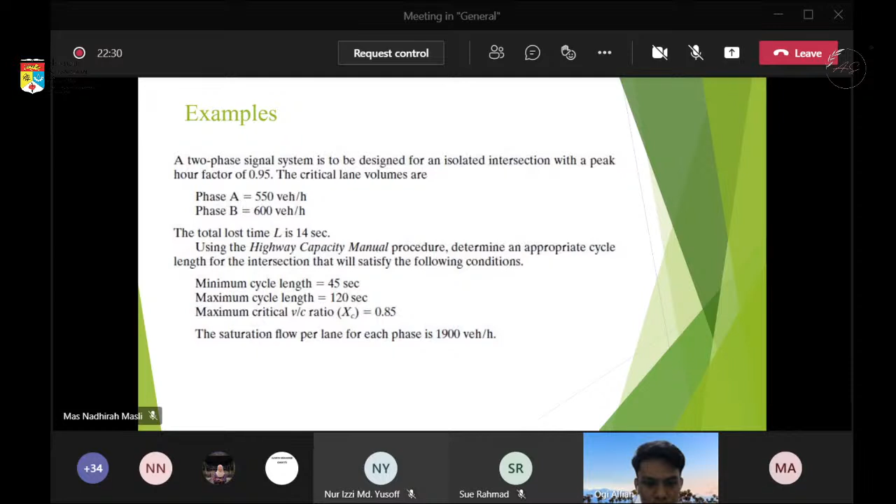The first step is to find the value for the first phase, which is V over C for A. So we divide V divided by S, and using the peak hour factor from the question, we find the value for V over C.

We also find the value for V over C for B. Next, we need to sum both values of V over C, and the value here is 0.637.

Using the formula XC, we calculate and substitute the values we found earlier. So we found that cycle time is 55.9 seconds, which is roughly around 60 seconds. This means that for each green time, the adequate green time is 60 seconds for the intersection. That's all for my part, I will pass to my friend.

I will pass to my friend. Any question from the floor? Semua faham? What's your friend trying to tell? Okay, continue.

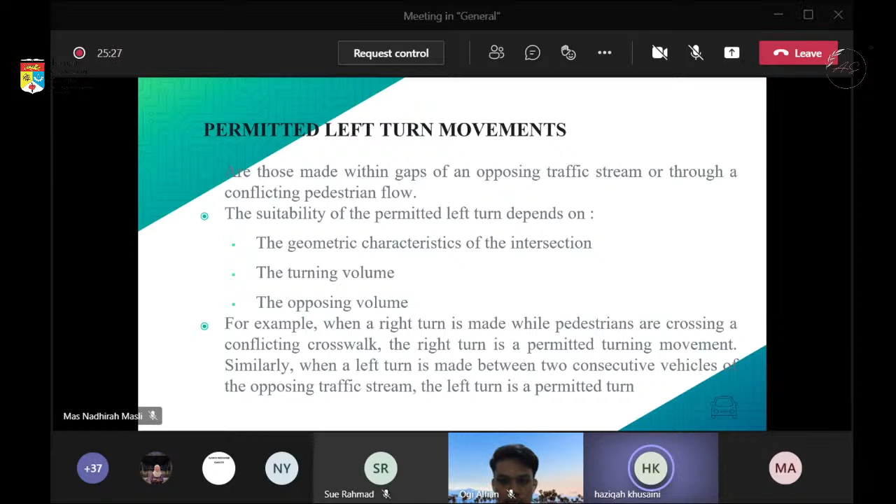Permitted left-turn movements are those made within gaps of an opposing traffic stream or through a conflicting pedestrian flow. The suitability of the permitted left turn depends on the geometric characteristics of the intersection, the turning volume, and the opposing volume. For example, when a right turn is made while pedestrians are crossing a conflicting crosswalk, the right turn is a permitted turning movement. Similarly, when a left turn is made between two consecutive vehicles of the opposing traffic stream, the left turn is a permitted turn.

Protected turn movement: turns protected from any conflict with vehicles in an opposing stream or pedestrians on a conflicting crosswalk. A permitted turn takes more time than a similar protected turn and will use more of the available green time. When a protected left-turn phase is provided, an exclusive left-turn lane must be provided. The length of the storage lane should be adequate for the turning volume so that the safety or capacity of the approach is not negatively affected. The length of the left-turn lane can be determined from figure 8.13 and table 8.4.

Table 8.4 shows the left turn bay length adjustment factors.

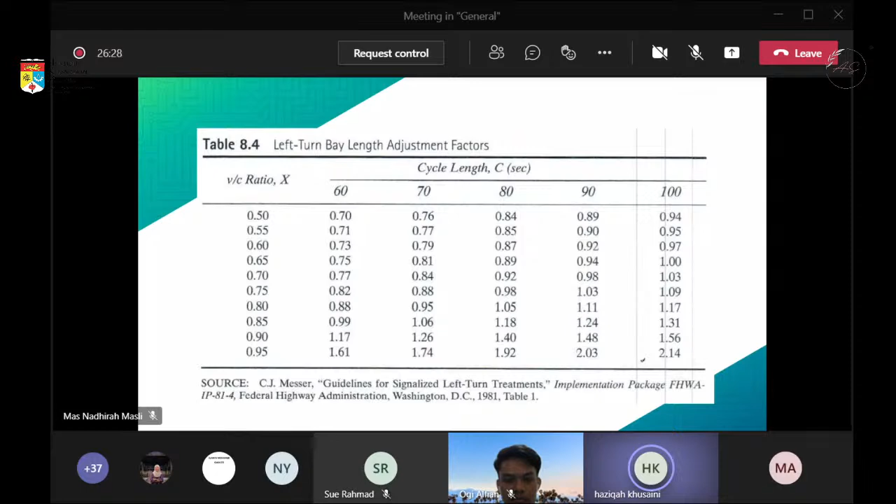Figure 8.13 gives values obtained for a cycle length of 75 seconds and a ratio of 0.80. For other values, the length obtained from this figure is multiplied by a correction factor obtained from table 8.4.

Protected or permissive left turn movement is a combination of the protected and permissive conditions. Vehicles are first allowed to make left turns under protected conditions, and then allowed to make left turns under the permissive conditions.

Highway Capacity Manual guidelines for providing a protected left turn treatment phase: it should be provided when two or more left turn lanes are on the approach, when the left turn adjusted volume is higher than 240 vehicles per hour, or when the cross product of the adjusted left turn and opposing main line volume exceeds the value given in table 8.5.

The opposing volume usually includes the right turn volume, unless the analyst is confident that the geometry of the intersection is such that left turn vehicles can safely ignore the opposing right turn vehicles.

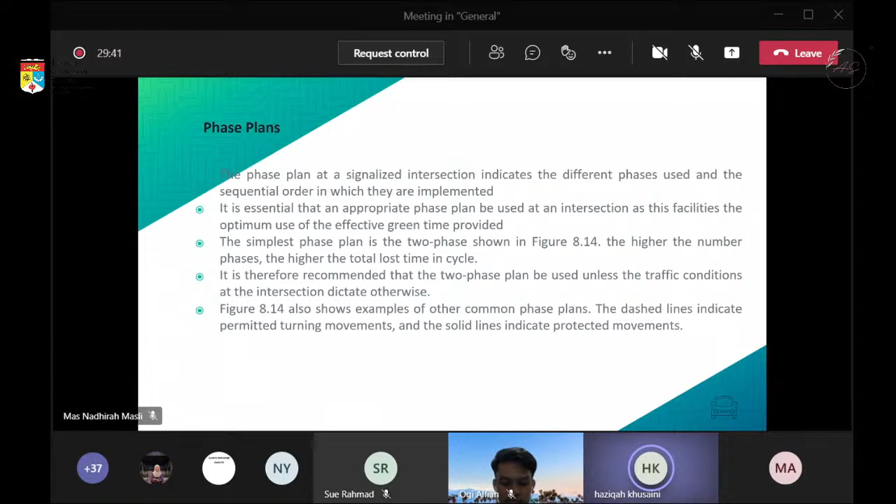Figure 8.14 also shows examples of other common phase plans. The dashed line indicates permitted turning movement, and the solid line indicates protected movement.

These are the figure 8.14 phase plans for pretimed and actuated signals. That's all from me, thank you.

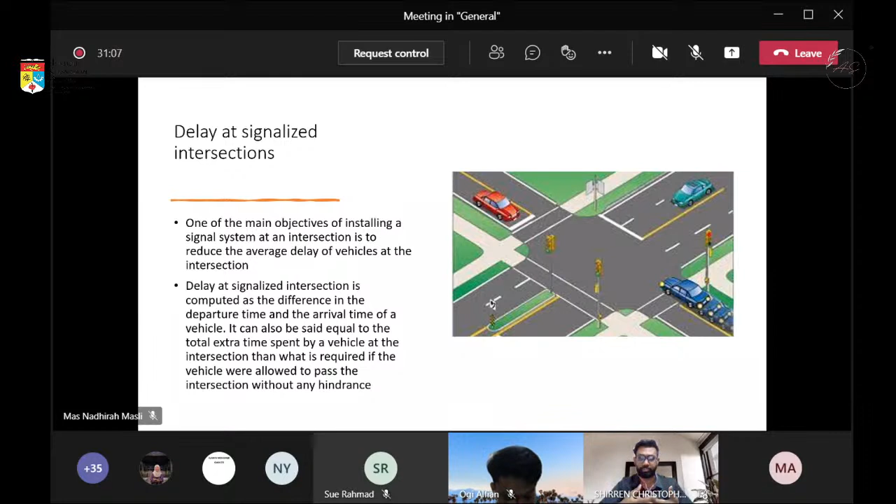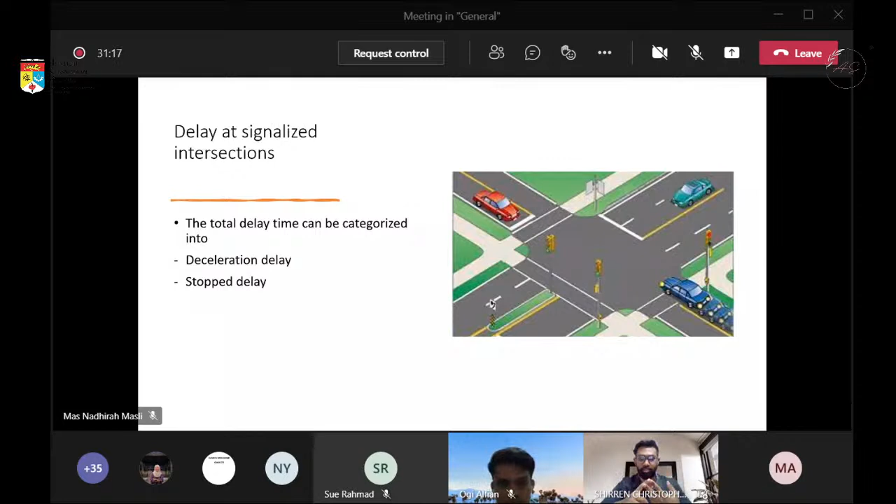The total delay time can be categorized into two different factors: deceleration delay and stopped delay. I'll explain this in the next slide.

The deceleration delay is the time loss that a vehicle takes in slowing down to reach a stop in case the signal is red, or the time loss in a queue moving when the signal is green. For instance, with cars number 1, 2, and 3: when the signal turns green, car 1 takes a certain amount of time to react, the second car takes lesser time, and the third car takes even lesser time, with the consequent cars being roughly constant in their reaction delay upon the signal turning green.

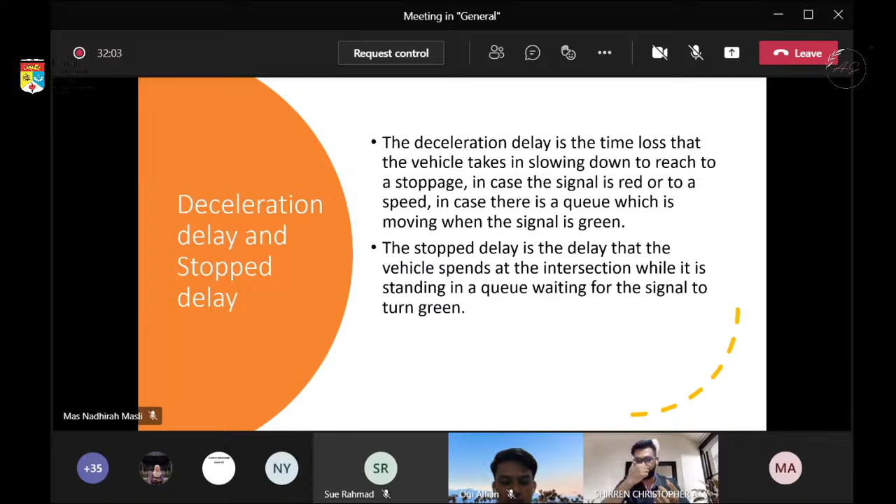The stop delay is the delay that the vehicle spends at the intersection while standing in a queue, waiting for the signal to turn green. Next, Ajay.

Speaking on the delay, although most of the delay incurred at a signalized intersection is directly caused by the traffic signal operation, a fraction of the delay is due to the time required by the individual to react to the change of signal display at the beginning of the green interval, plus mechanical constraints and individual driver behaviors. What this statement is trying to say is that it depends on the physical attributes of the driver himself in delaying his movement when the signal turns green.

For example, when the headway of departure vehicles is observed, it is seen that the front vehicle of the queue takes more time to cross a stationary point than the following vehicles, until it reaches the saturation headway. The saturation headway is the point where, after the first, second, and third vehicles have successfully moved past the delay, the following vehicles move at a constant speed - that's known as the saturation headway after some time.

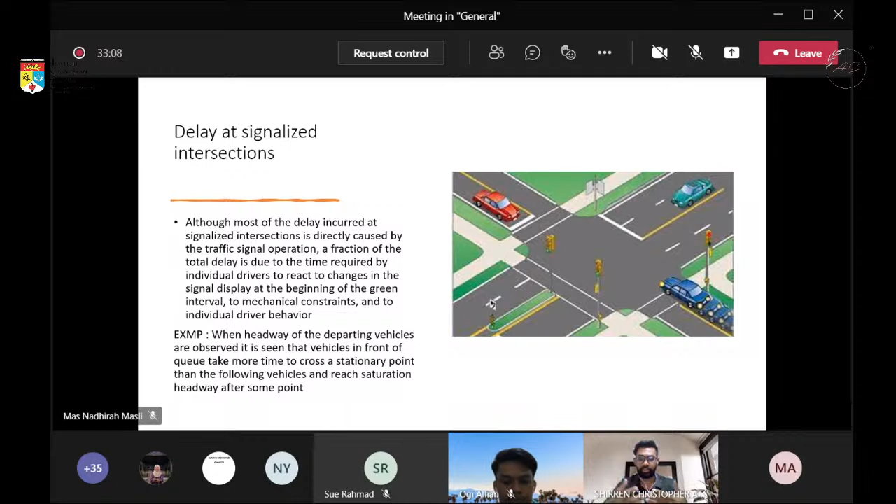In delay estimation models, to account for the additional delays due to driver reaction time and vehicle acceleration constraints, the operation of a signalized intersection is usually defined in terms of an effective signal interval instead of the actual interval. The amount of difference between the actual and effective timing will thus depend on the assumption regarding driver reaction time at the beginning of the green interval and vehicle acceleration.

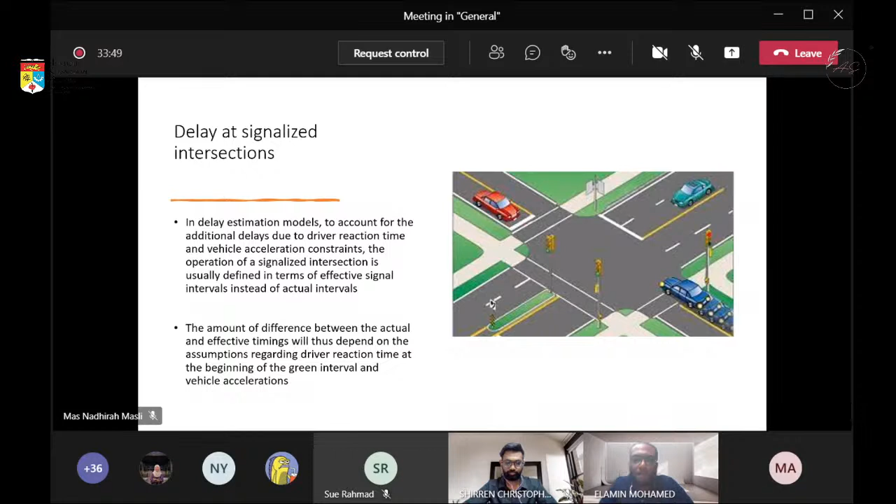Next, in order to estimate delay, we can use the expression developed by Webster, which is D equals C times A plus B over V times 100 minus C over 100, where D is average delay per vehicle, V is actual volume, lambda is proportion of cycle length, XG is degree of saturation, and C is percentage correction.

The total hour delay of any approach can be estimated by determining D for each lane on that approach, multiplying each D by the corresponding lane volume, and then summing these values. The total intersection hour delay can then be determined by summing the total delay for each approach.

This is the A values table we will use. They can be calculated directly using the formula mentioned in the first slide, or taken from this table for A and B, and correction value C.

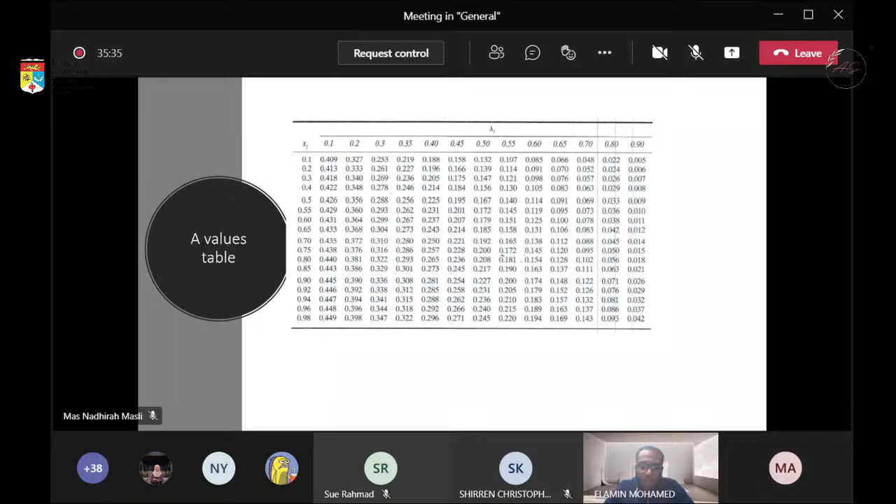So the A and B values depend, as you can see in the table, on the XG value and lambda value.

Next is cycle lengths of actuated traffic signals. A major disadvantage of fixed or pre-timed signals is that they cannot adjust themselves to handle fluctuating volumes. A vehicle-actuated signal is used when the fluctuation of traffic volumes warrants it. When such a signal is used, vehicles arriving at the intersection are registered by detectors which transmit this information to a controller.

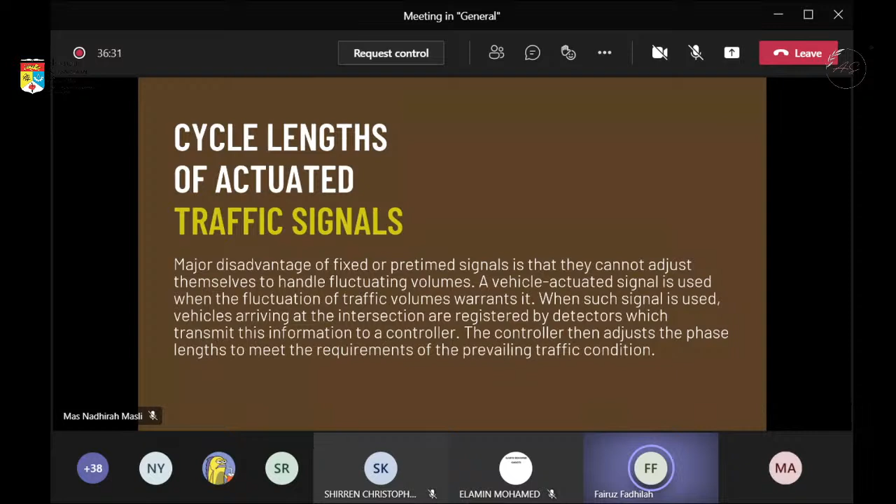The following terms are associated with actuated signals. First, demand - a request for the right of way by a traffic stream through the controller. Second, initial portion - the first portion of the green phase that an actuated controller is timed out for vehicles waiting between the detector and the stop line during the red phase. Third, minimum period - the shortest time that should be provided for a green interval during any traffic phase. Fourth, extendable portion - the portion of the green phase that follows the initial portion to allow for more vehicles arriving between the detector and the stop line during the green phase to go through the intersection.

Fifth, extension limit - the maximum additional time that can be given to the extendable portion of a phase after actuation on another phase. Sixth, unit extension - the minimum time by which a green phase could be increased during the extendable portion after an actuation on that phase. However, the total extendable portion should not exceed the extension limit.

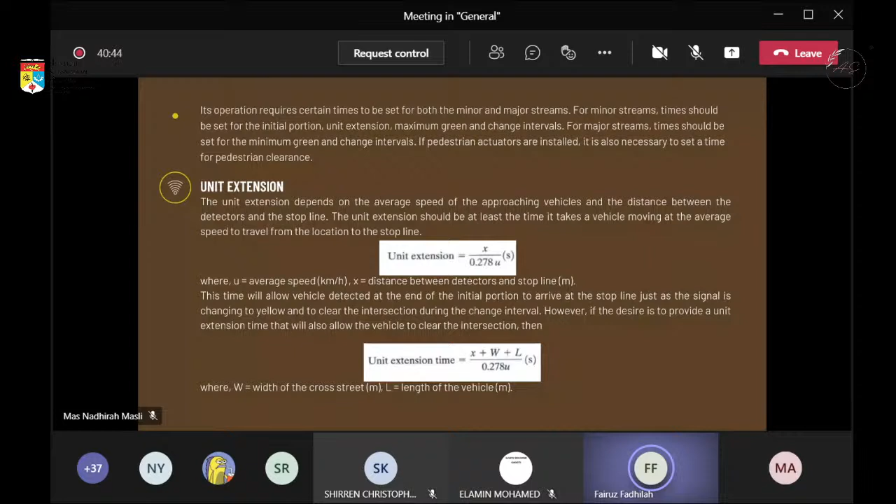Second one is initial portion. This time should be adequate to allow vehicles waiting between the stop line and detector during the red phase to clear the intersection. This time depends on the number of vehicles waiting, the average headway, and the starting delay. The time for the initial portion can be obtained as in the figure, where H equals average headway, N equals number of vehicles waiting between the detectors and the stop line, K1 equals starting delay. Third is minimum green. This is the sum of the initial portion and the unit extension.

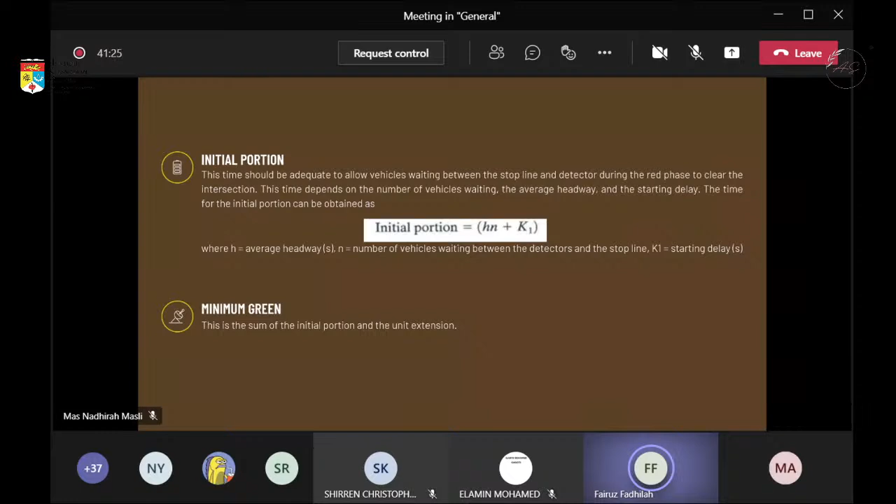Fully actuated signals. It is suitable for intersections at which large fluctuations of traffic volumes occur on all approaches during the day. Maximum and minimum green times are set for each approach. Its basic operation can be described using an intersection with 4 approaches and a 2-phase signal system.

Let phase A be assigned to the north-south direction and phase B to the east-west direction. If phase A is given the right of way, the green signal will stay on until the minimum green time ends, and an approaching vehicle in the east-west direction actuates one of the detectors for phase B. A demand for the right of way in the east-west is then registered. If there is no traffic in the north-south direction, the red signal will come on for phase A and the right of way will be given to vehicles in the east-west direction. That is, the green indicator will come on for phase B.

This right of way will be held by phase B until at least the minimum green time expires. At the expiration of the minimum green time, the right of way will be given to phase A, that is the north-south direction, only if during the period of the minimum green, a demand is registered by an approaching vehicle in this direction. If no demand is registered in the north-south direction and vehicles continue to arrive in the east-west direction, the right of way will continue to be given to phase B until the maximum green is reached. At this time, the right of way is given to phase A, and so on.

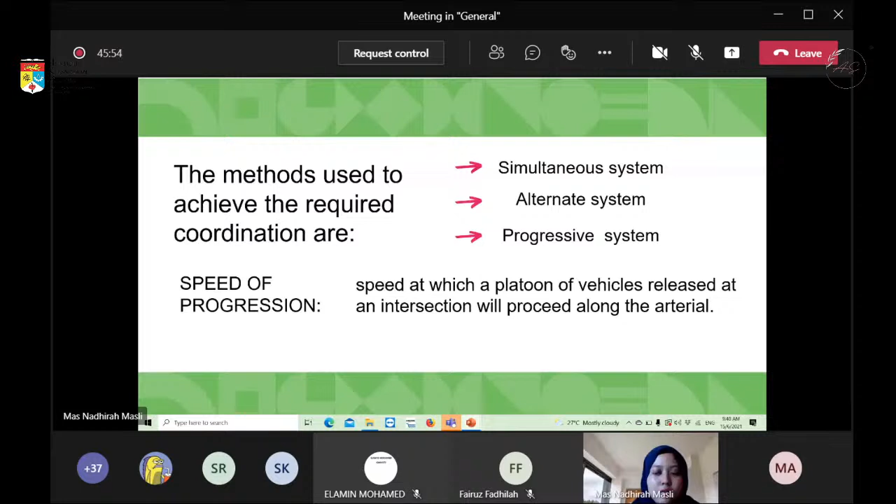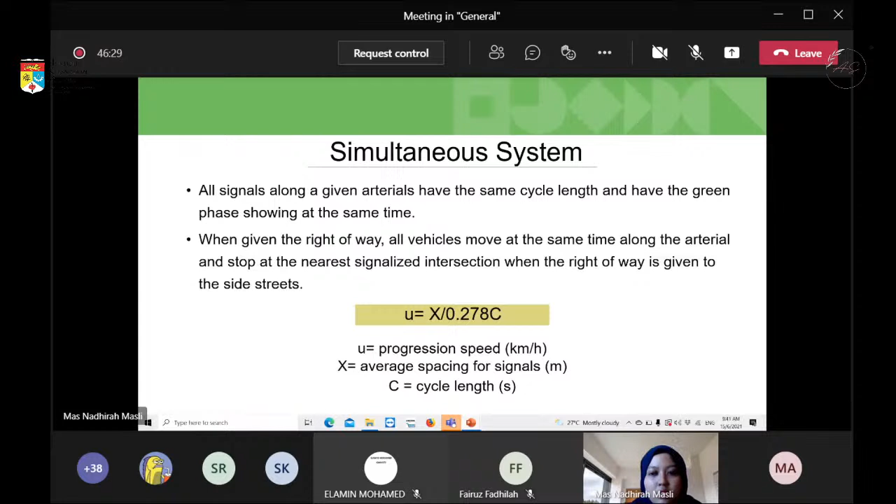An alternate system is most effective when the intersections are at equal distance from each other. Move on to the next point.

The progressive system. The progressive system provides for a continuous flow of traffic through all intersections under the system when traffic moves at the speed of progression.

The same cycle length is used for all intersections, but the green indication for each succeeding intersection is offset by a given time from that of the preceding intersection, depending on, first, the distance from the preceding intersection, and second, the speed of progression for that section of the street. The limited or simple progressive system is when the offset and cycle length are fixed. The flexible progressive system is when the offset and cycle length can be changed to meet the demand of fluctuating traffic at different times of the day.

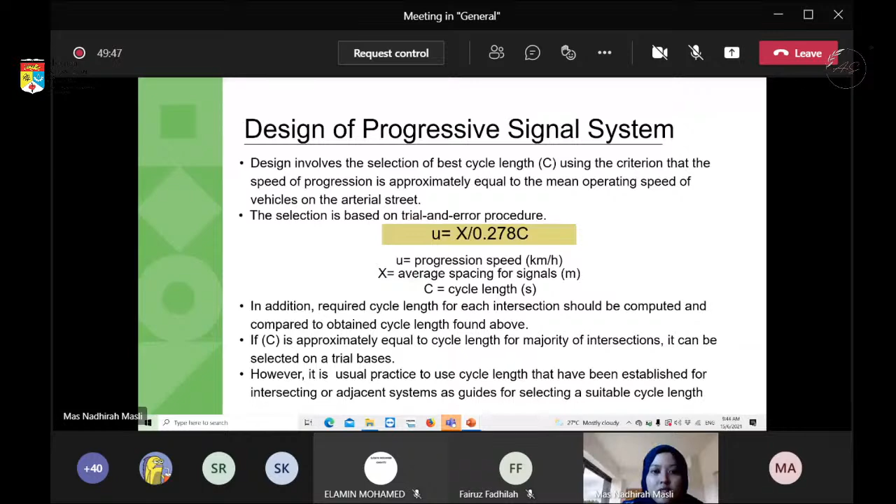Move on to example 8.8. Signals on an urban arterial are to be coordinated to facilitate the flow of traffic. The intersections are spaced at approximately 150-meter intervals, with at least one intersection being part of another coordinated system, whose cycle length is 60 seconds. Determine whether single, double, or triple alternate system is preferable for this arterial if the mean velocity on the arterial is 56 km/h.

We can use the alternate system equation. The solution is: since there is one intersection in another coordinated system, it is necessary to use the cycle length at that intersection, that is, C equals 60 seconds. We also use the alternate system equation. So this is how to use it. Okay, that's all from me.

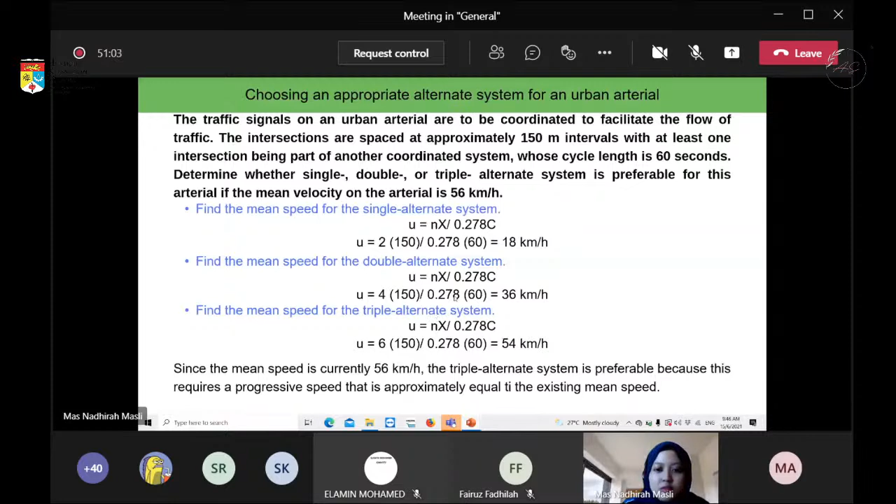Okay, next, freeway ramp.

Ramps are part of a grade-separated intersection where they serve as an interconnecting roadway for traffic streams at different levels, and are sometimes constructed between two parallel highways to allow vehicles to change from one highway to the other. They are divided into two groups: entrance ramps, which allow the merging of vehicles into the freeway stream, and exit ramps, which allow vehicles to leave the freeway stream.

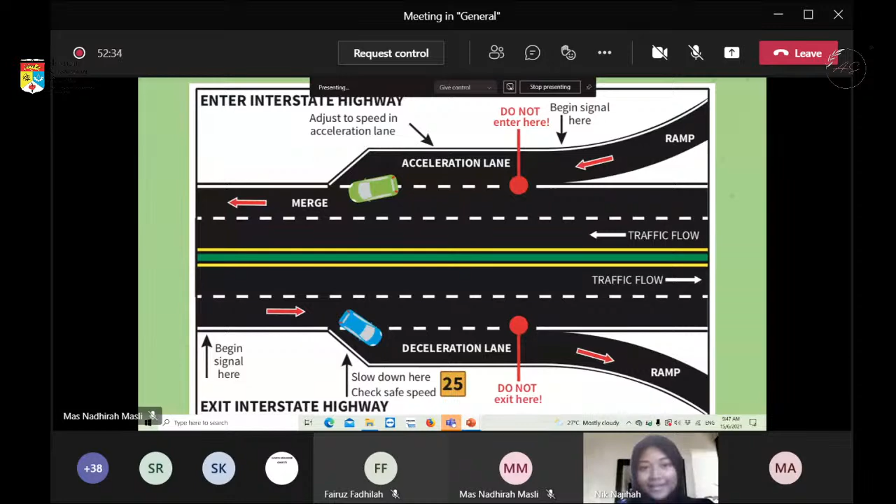The freeway entrance control is essential to efficient operation of freeways when volumes are high. The main objective is to regulate the number of vehicles entering the freeway so that the volume is kept lower than the capacity of the freeways, also to reduce freeway crashes.

There are three methods of controlling freeway entrance: closure, local isolated metering control, and system-wide coordinated metering control.

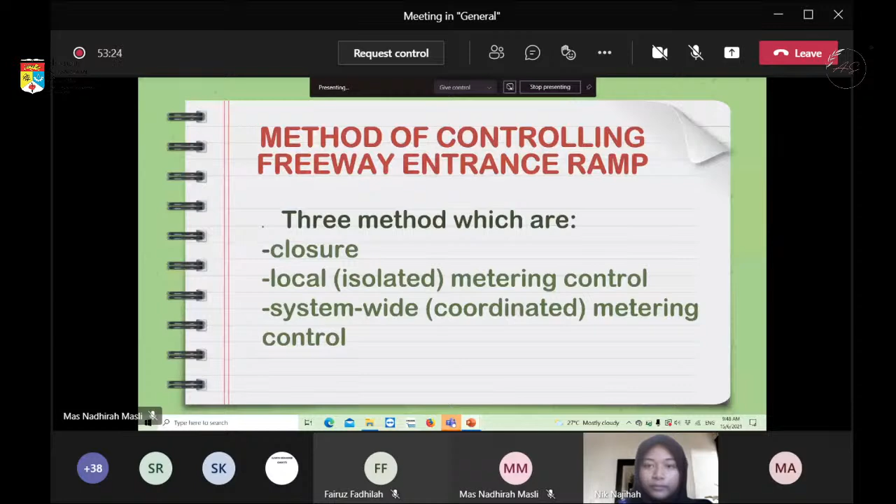For closure, usually a do not enter sign is used, or a barrier is placed at the entrance to the ramp. There are three types of closure ramps: permanent, temporary, and time of day or scheduled ramp closure.

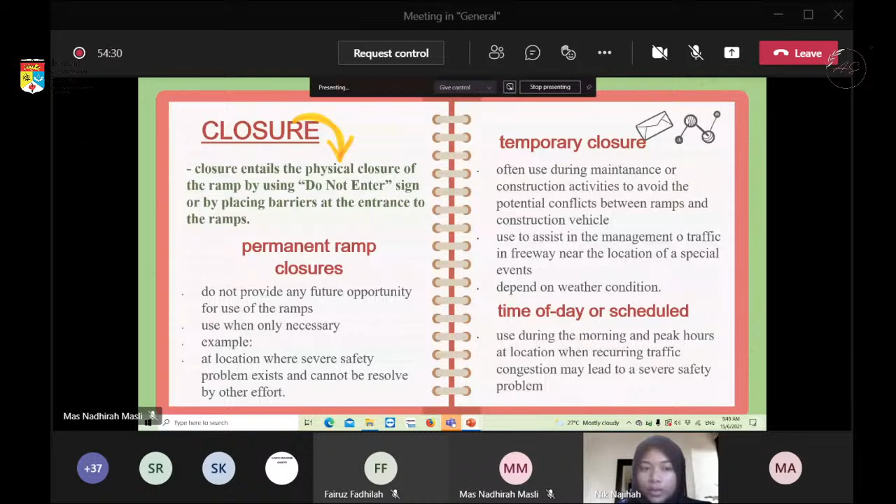Hello, okay. Next is local or isolated metering control. This method uses conditions at a specific ramp to determine the metering rate, with the objective of improving safety or alleviating congestion at the ramp.

This metering method can also be used at two or more ramps on the freeway, where the effect of metering at one ramp is not coordinated with the effect at another.

Next is system-wide or coordinated metering control. Here, conditions are used that include those at other adjacent ramps to determine the metering rate. This method can therefore be used for ramps along a freeway segment, an entire corridor, or several corridors where a problem at one ramp may affect other adjacent ramps.

This control is more effective than local control in dealing with capacity reduction that occurs as a result of road blockage and collision.

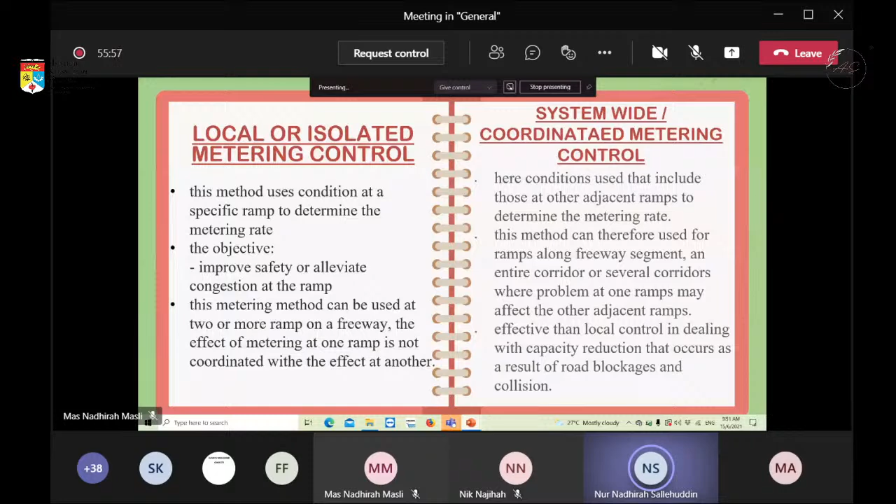Next is for the ramp closure. It consists of two components: barrier and enforcement personnel. Barriers can be either manually placed or automated.

For manual barricades, they can be either portable or fixed. Portable barricades can be moved from place to place and include gates and cones. Next is the fixed barricade.

Fixed barricades are usually permanently installed and provide the flexibility of opening and closing the ramp in response to traffic congestion.

For the automated barricade, it is a fixed barricade that can be operated from a traffic management center, TMC, or from another remote location. Next is the enforcement personnel.

Enforcement personnel is another method of ramp closure. This method is usually used on a temporary basis when automated systems are either not installed, or maintenance personnel are not able to install the temporary barricades. That's all from me.

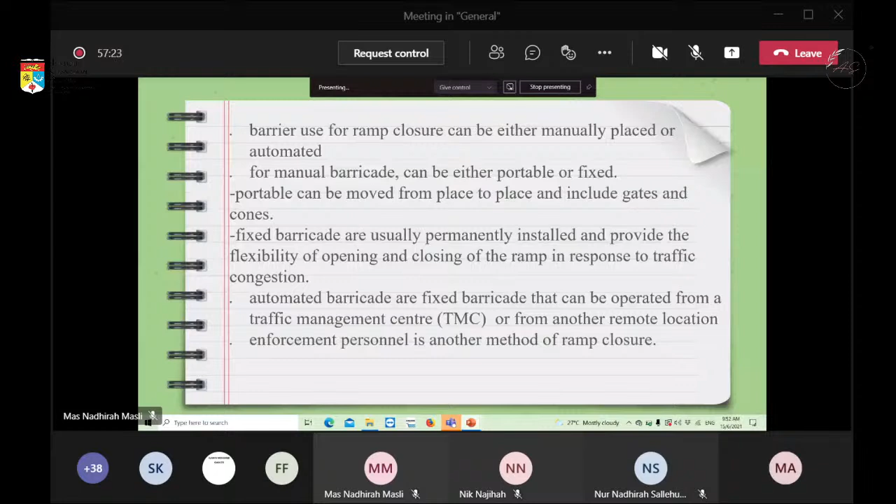Before I go further, first of all we need to know that ramp meters are one of our tools in freeway management. Ramp meters are traffic signals installed on freeway on-ramps to control the frequency at which vehicles enter the flow of traffic on the freeway.

Ramp metering also reduces overall freeway congestion by managing the amount of traffic entering the freeway. There are two methods of controlling ramp meters: the first is pre-timed metering, and the second is traffic responsive metering.

Pre-timed metering rates are usually made for different times of the day and days of the week. This can be used to reduce flow of traffic on the ramp from 1,200 vehicles per hour to 250 vehicles per hour.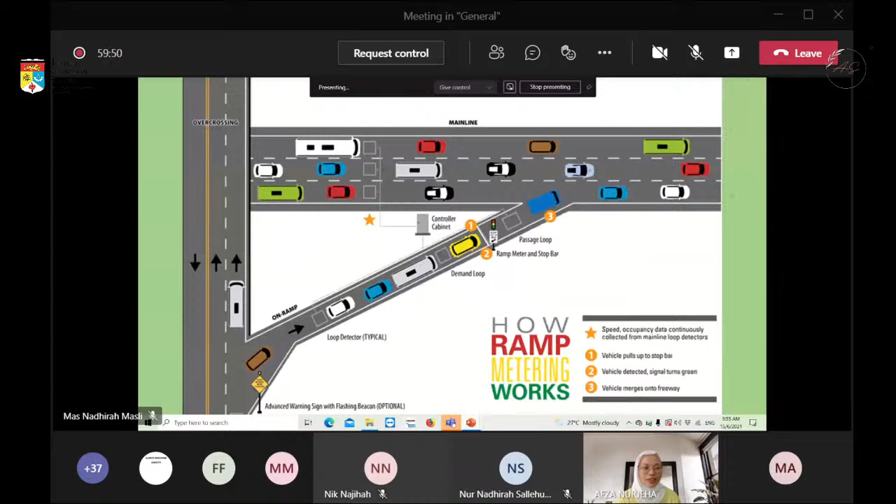Okay, this is also an example. As we can see, at the start loop, data is collected such as speed and other occupancy data from the main line. At point 1 is where the vehicle is pulled up to the stop bar, and at point 2 we can see there is the ramp meter where the vehicle stops.

When a vehicle is detected, the signal turns green, and then the vehicle can merge onto the freeway.

Okay, the second method of controlling the ramp meter is traffic responsive metering. This method uses actual current information on traffic conditions from freeway loop detectors or other methods of metering, and it is capable of responding to short-term changes in traffic conditions.

The layout is quite similar to pre-timed metering, but there are some additional features. There are two methods that can be used to determine the metering rate: the first is local traffic responsive, and the second is system-wide traffic responsive.

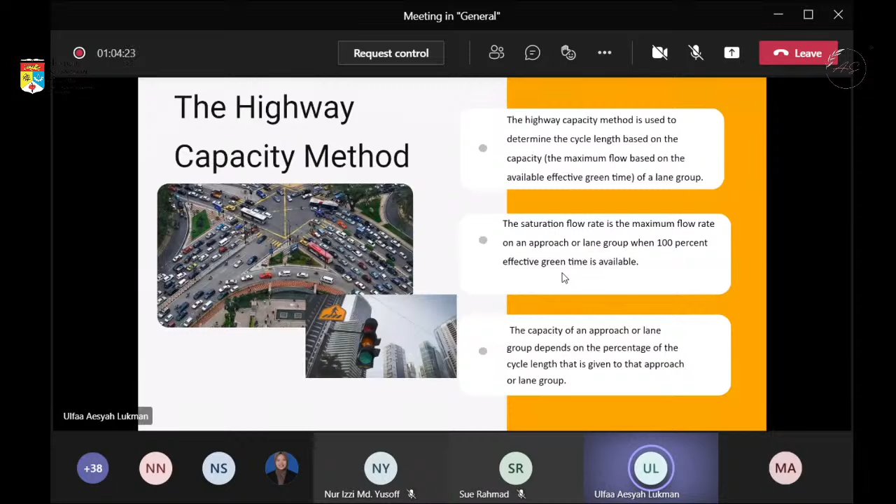Next we have the formula for the capacity of an approach or lane group, which is CI. We also have the formula for the ratio of flow to capacity, which is V per C. Next, we have the formula for the critical VC ratio for the intersection, which is XC. If VC ratio is less than 1, the cycle length provided is adequate.

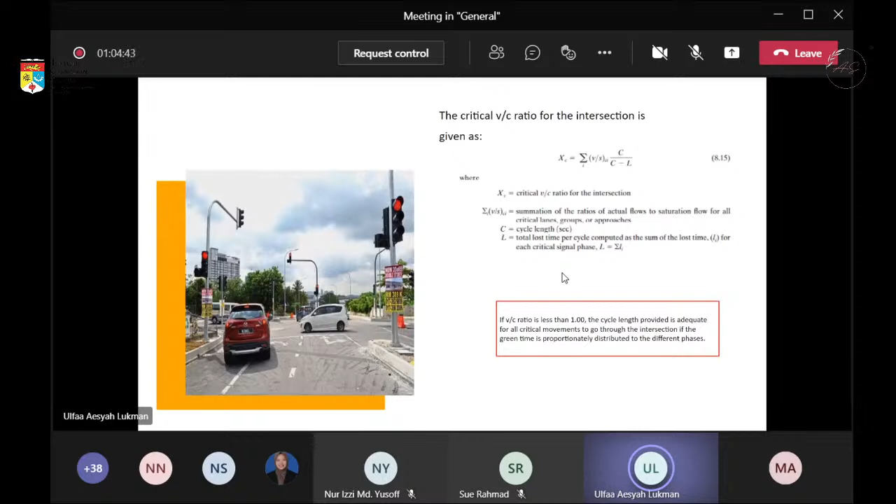Example 8.6. From this question we can see we have 4 different flow ratios and we need to find, number 1, the shortest cycle length that will avoid oversaturation. Number 2, the cycle length if the desired critical VC ratio is 0.95. And number 3, the critical VC ratio if a cycle length of 90 seconds is used.

To solve number 1, we know the shortest cycle length that will avoid oversaturation is the cycle length corresponding to the critical ratio XC, which is equal to 1. And we need to find C, which is cycle length. So we can just use the formula shown just now and solve this question, and the same goes for number 2 and number 3. Next is example 8.7.

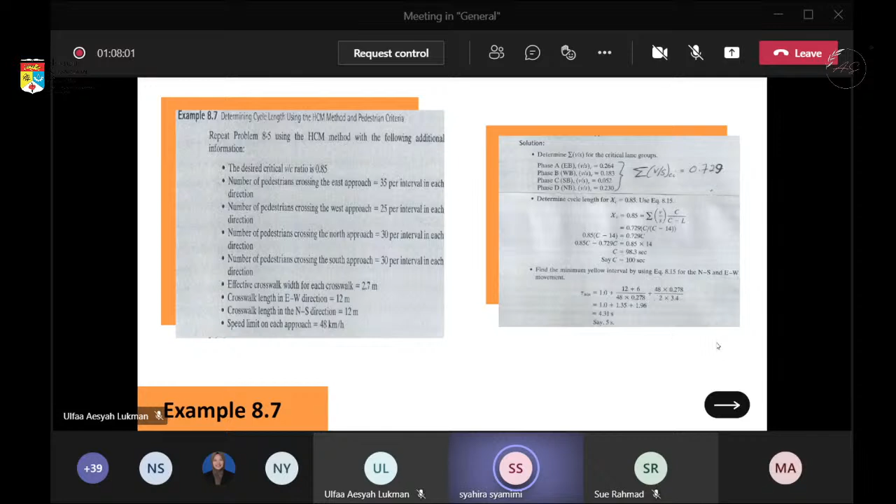First we need to find the XC, then the C, then we need to find the minimum yellow, which is tau minimum. Then we need to find the minimum time required for each approach: east, west, south, north. We also need to determine the left turn treatment. The left turn treatment is how a vehicle at a signalized intersection can proceed under three signals, so we need to choose between permitted, protected, and protected-permissive.

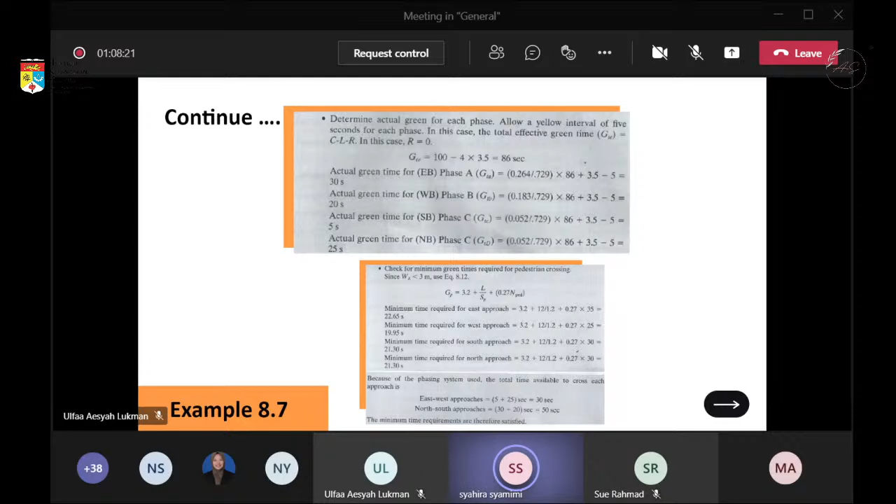So we need to determine, within these three signals: permitted, protected, and protected-permissive turning movement.

As for permitted, the turning movements are those made between gaps of an opposing traffic stream or through a conflicting pedestrian flow. For example, when a right turn is made while pedestrians are crossing a conflicting crosswalk, the right turn is a permitted turning movement. The suitability of permitted turns at a given intersection depends on the geometric characteristics of the intersection, so the turning volume and the opposing volume are considered.

Protected turns are those protected from any conflict with vehicles in the opposing stream and pedestrians in the conflicting crosswalk. Protected-permissive combines the protected and permissive conditions, which allows the car to make left turns first under the protected condition, and then subsequently under the permissive condition.

Hence, we need to determine the specific treatment at the location depending on the transportation jurisdiction, as the guidelines vary from one jurisdiction to another.

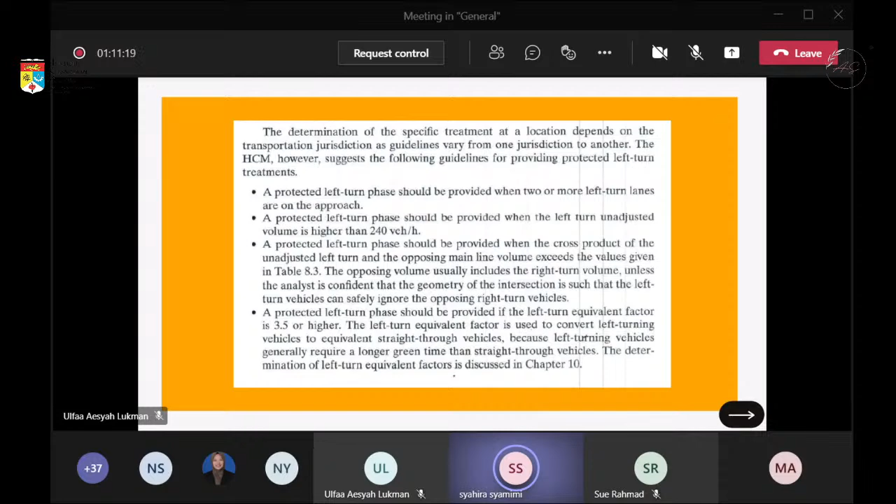I guess that's all for me. Next. Go on to the next slide, which is about the delay at pre-timed signalized intersections.

The main objective of signal timing is to reduce average delay of vehicles and reduce the probability of crashes. Delay is an important measure of effectiveness used in the evaluation of a signalized intersection.

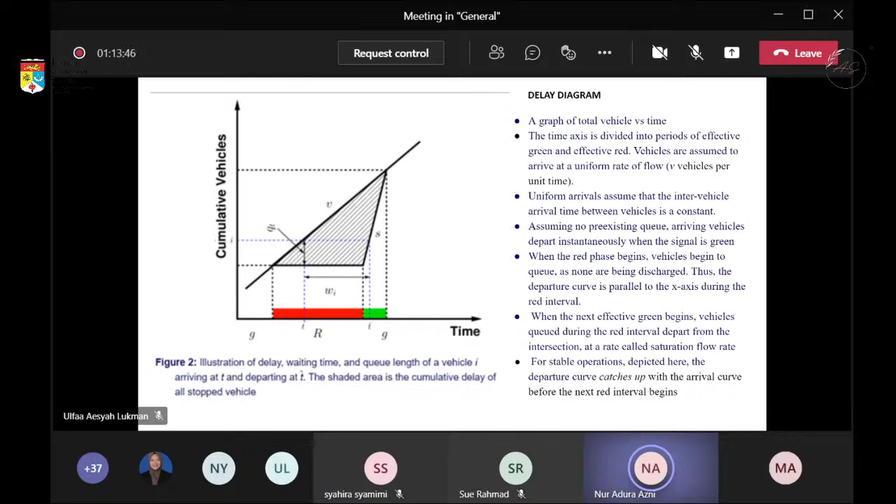Next is about uniform delay. Uniform delay is based on an assumption of uniform arrivals and stable flow with no individual cycle failures, meaning no vehicles are forced to wait for more than one green phase to be discharged. During every green phase, the departure function catches up with the arrival function. Total aggregate delay during this period is the total of all the triangular areas between the arrival and departure curves. This type of delay is known as uniform delay, where uniform vehicle arrival is assumed.

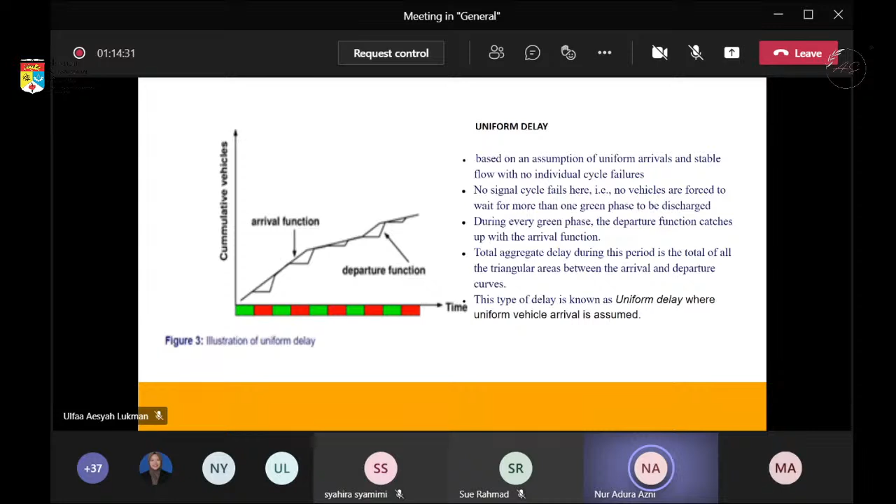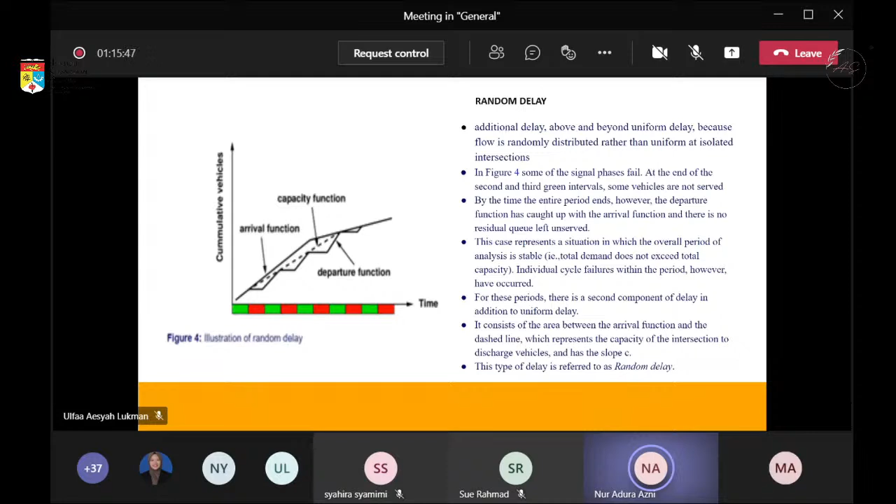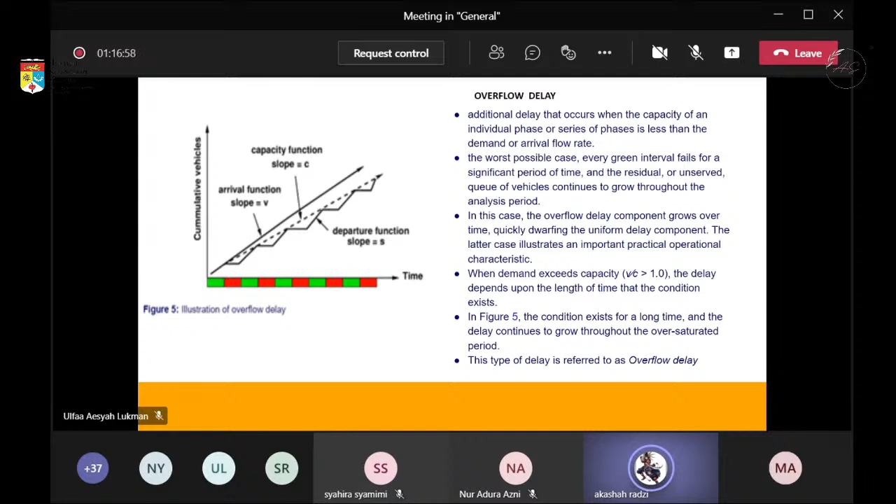This graph is about overflow delays, an additional delay that occurs when the capacity of an individual phase or series of phases is less than the demand or arrival flow rate. In the worst possible case, every green interval fails for a significant period of time, and the residual or unserved queue of vehicles continues to grow throughout the analysis period. In this case, the overflow delay component grows over time, quickly dwarfing the uniform delay component. This illustrates an important practical operational characteristic: when demand exceeds capacity, V over C more than 1.0, the delay depends upon the length of time that the condition exists. In figure 5, the condition exists for a long time and the delay continues to grow throughout the oversaturated period. This type of delay is referred to as overflow delay.

Next. Delay at a signalized intersection can be expressed using the equation below. Next.

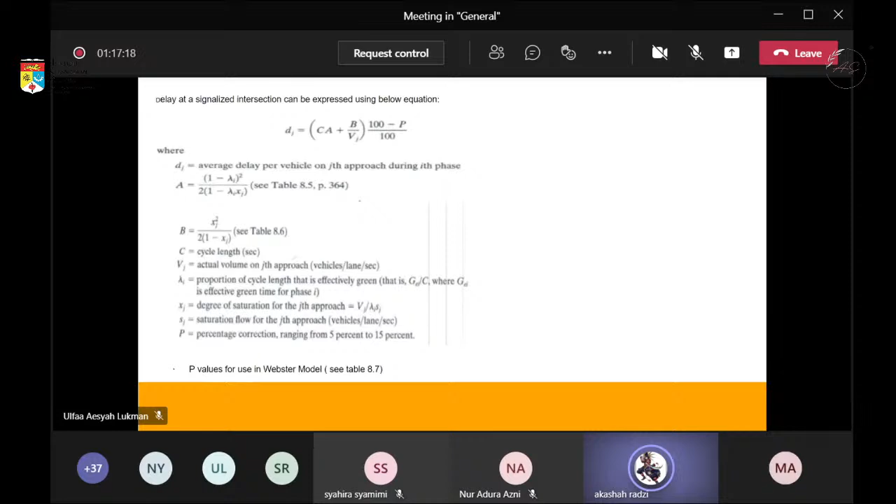For the first one, two phase: each leg of the street with a left-turn phase has its own phase. Each phase ends as soon as it runs out of traffic. This is also called split phasing.

The next one, three phase, with an exclusive left-turn phase. The lagging left turns are after the opposing through phase. Note that each through phase can end separately, each one ending as soon as it runs out of traffic.

The leading lagging green overlapping phase: the leading left turn is before the opposing through phase, or the lagging left turn is after the opposing through phase. Note that the leading left turn phase must end before the lagging left turn phase can begin.

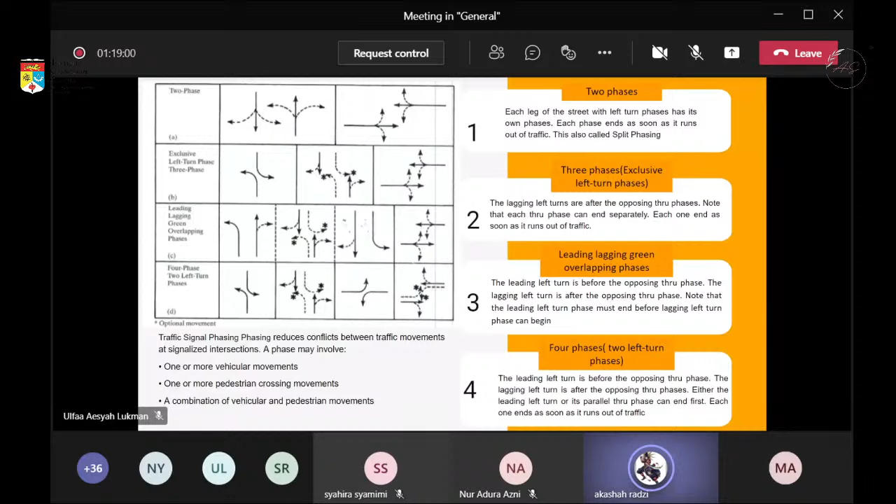The last one, four phase with two left-turn phases: the leading left turn is before the opposing through phase, or the lagging left turn is after the opposing through phase. Either the leading left turn or its parallel through phase can end first, each one ending as soon as it runs out of traffic. That's all.

Assalamualaikum and good morning. So, what is the cycle length of an actuated traffic signal? This type of signal varies according to the demand of traffic as registered by the actuation of vehicle or pedestrian detectors at one or more approaches. Actuated traffic signals are capable of adjusting themselves. When vehicles arrive at an intersection, signals are registered by the detector, then transmitted to a controller. Phase length can be adjusted to meet the requirements of the prevailing traffic control condition. It can be either semi-actuated or fully actuated.

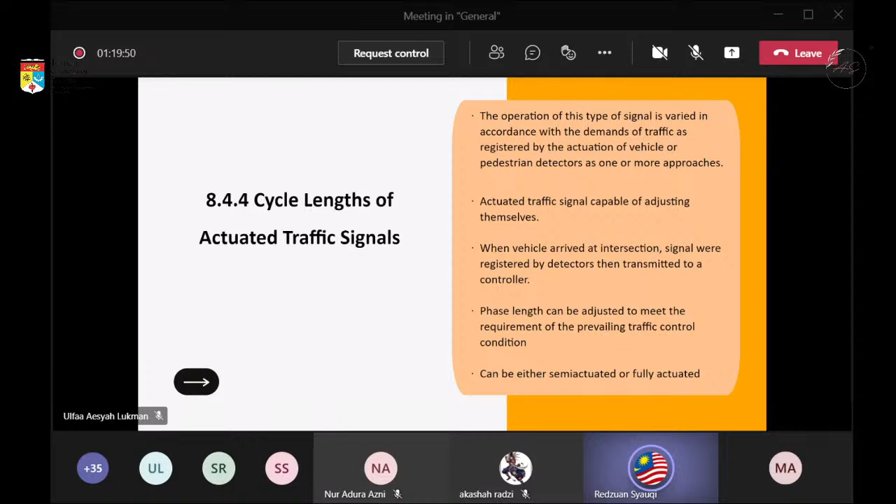Next slide please. This is based on ATJ, Arahan Teknik Jalan 13/87, page 28, which states the advantages of traffic actuated signals. First, it usually reduces delay if properly timed. Second, it is adaptable to short-term fluctuations. Third, it usually increases capacity. Fourth, it provides continuous operation under low volume conditions as an added safety feature, when a pre-timed signal should be put on flashing to prevent excessive delay. And the last one, it is especially effective at multiple phase intersections.

Next slide is the disadvantages of traffic actuated signals. First, the cost of an actuated installation is 2 to 5 times the cost of a pre-timed signal installation. Second, actuated controllers and detectors are much more complicated than pre-timed controllers, increasing maintenance and inspection skill requirements and costs. Third, the detectors are costly to install and require careful inspection and maintenance to ensure proper operation.

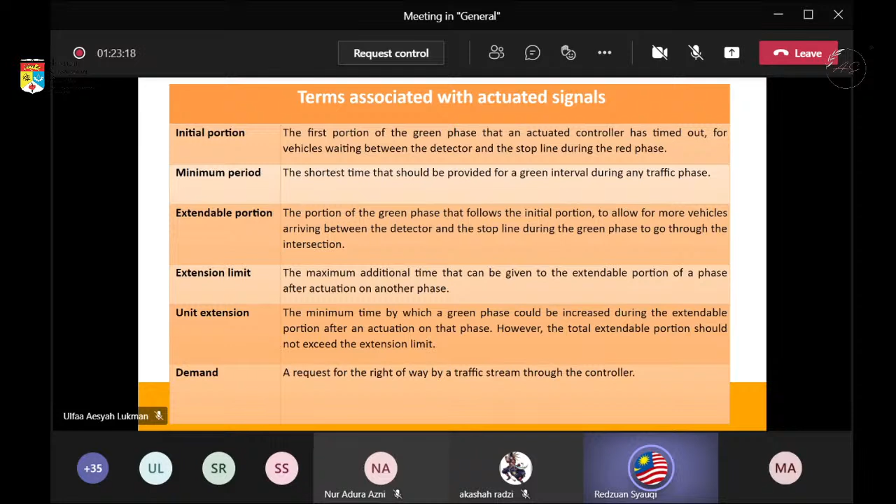Demand: a request for the right of way by a traffic stream through the controllers. Next is semi-actuated, which will be presented by Wan Muhammad Hafiz.

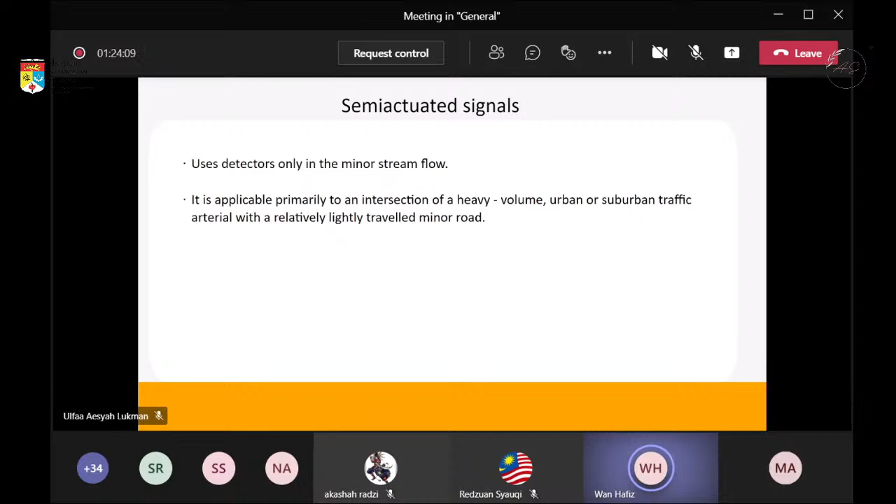So here is the essential operating feature for the controller for the semi-actuated signal. As stated before, detectors are on the minor approach only, and the green signal on the major approach is preset for a minimum period, but it will stay on until the signal is actuated by a minor stream vehicle. If the green signal on the major approach has been on for a period equal to or greater than the preset minimum, the signal will change to red in response to the actuation of the minor stream vehicle.

Next, the green signal on the minor stream will then come on for at least a period equal to the preset minimum for that stream. This minimum is given by an extendable green for each vehicle arriving, up to the preset extension limit. The signal on the minor stream then changes to red, and that on the major stream changes to green, and so on.

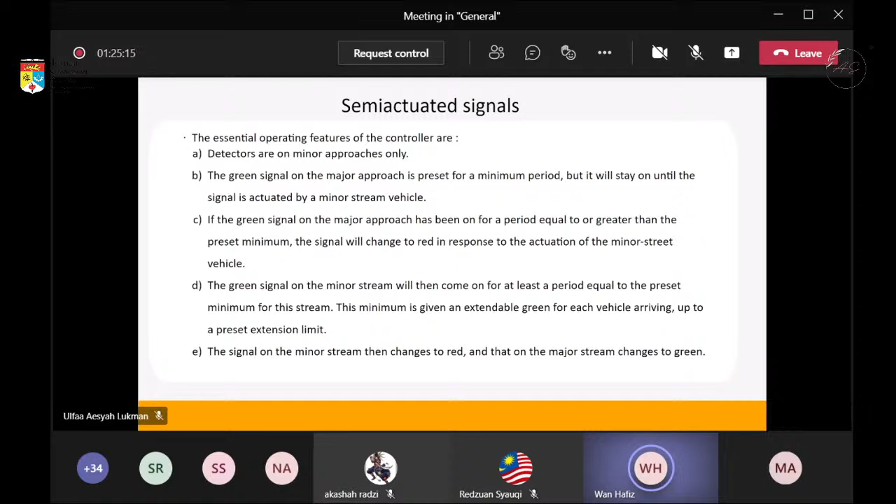So for the minor stream, we should set the time for the initial portion, unit extension, maximum green (which is the summation of initial portion and extension limit), and also the change interval. Whereas for the major stream, time should be set for the minimum green and change interval. If pedestrian actuators are installed, it is also necessary to set a time for pedestrian clearance.

Note that the semi-actuated signal will be set as a pre-timed signal if during the peak hour the vehicle volume at the minor stream is high for that time. So the minimum green is the summation of the initial portion and the unit extension.

Here is the formula we use for the unit extension for the detector. Unit extension is equal to x over 0.278u, whereas u is the average speed and x is the distance between the detector and the stop line.

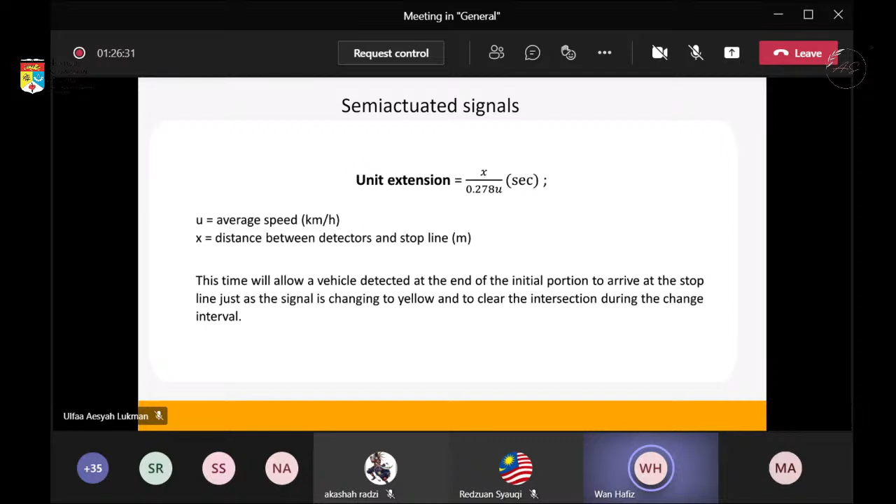So the unit extension is the time that allows a vehicle detected at the end of the initial portion to arrive at the stop line just as the signal is changing to yellow, and to clear the intersection during the change interval.

But if we desire to provide a unit extension type that allows the vehicle to clear the intersection, we use the unit extension time formula. It is just the same, except x plus w plus l, over 0.278u, where w is the width of the cross street and l is the length of the vehicle.

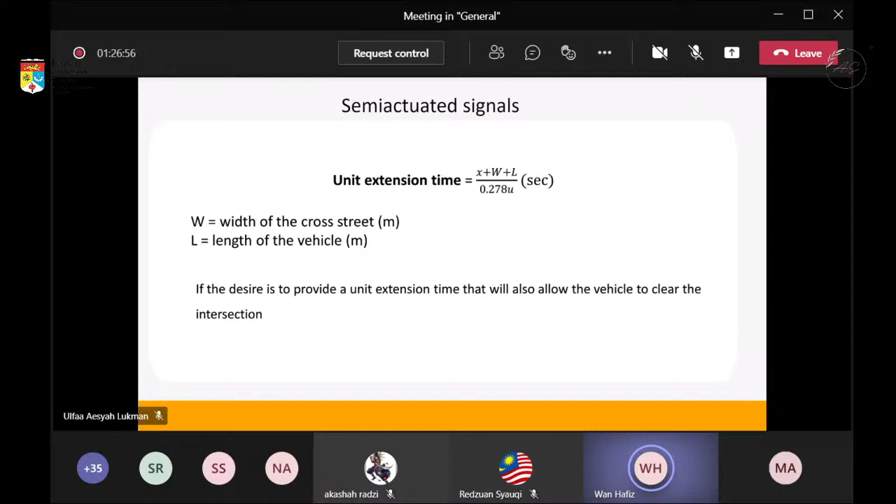Here is the initial portion formula: hn plus k1, where h is the average headway, preferably 2 seconds as stated in the textbook, and n is the number of vehicles waiting between the detector and the stop line. k1 is the starting delay, preferably 3.5 seconds as stated in the textbook. This time should be adequate to allow vehicles waiting between the stop line and detector during the red phase to clear the intersection.

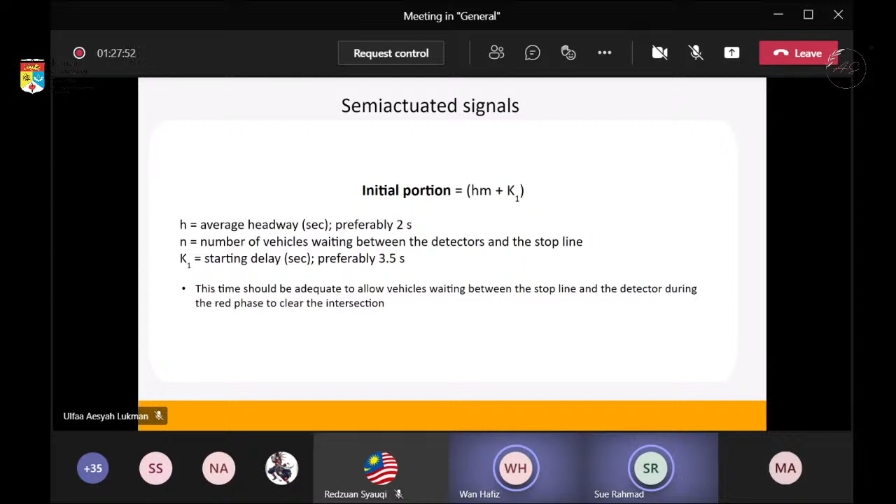Okay, continue. For the fully actuated signal: this means we have detectors at both streams. It is suitable for intersections where large fluctuation of traffic volume occurs on all approaches during the day. Maximum and minimum green times are set for each approach. Let's consider a two-phase signal system at the intersection below.

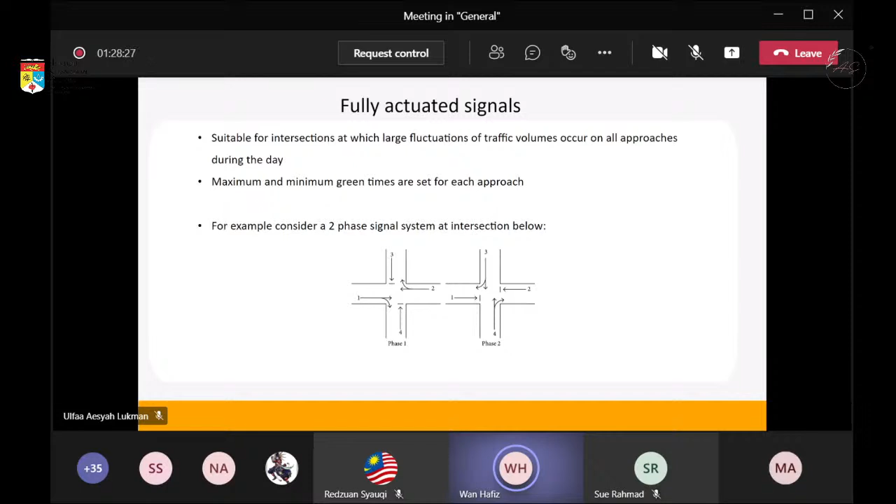As you can see from the figure, we have two phases: direction from 1, 2, and direction from 3, 4. If phase 1 is given the right of way, the green signal will stay on until the minimum green time ends. An approaching vehicle in the 3, 4 direction actuates one of the detectors for phase 2, and a demand for right of way in that direction is registered. If there is no traffic left in the 1, 2 direction, the red signal will come on for phase 1, and right of way will be given to the vehicle in the 3, 4 direction - the green indicator will come on for phase 2.

Next, this right of way will be held by phase 2 until at least the minimum green time expires. But if there are no vehicles in the 1, 2 direction at the end of the minimum green time for phase 2, and vehicles are still moving from the 3, 4 direction, the right of way will still be given to phase 2 until the maximum green time is reached. After the maximum green time for phase 2 is reached, right of way will be given to phase 1, and the cycle repeats.

And we can still use those three formulas to set the time.

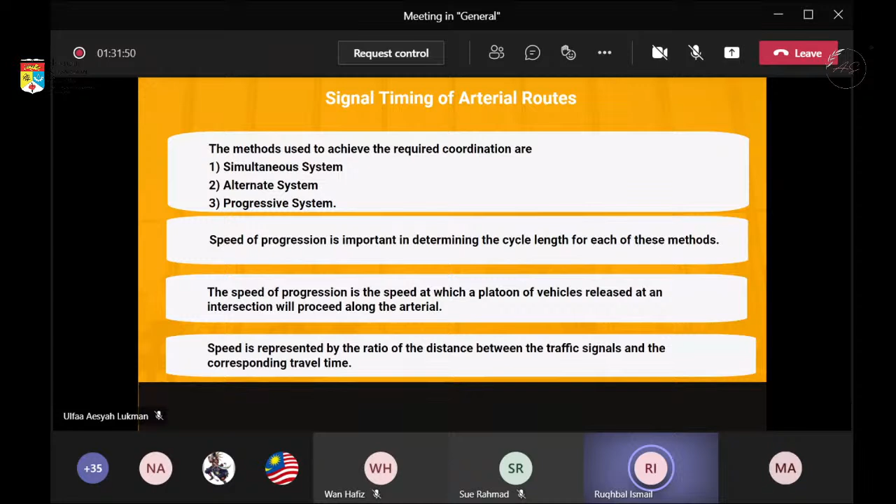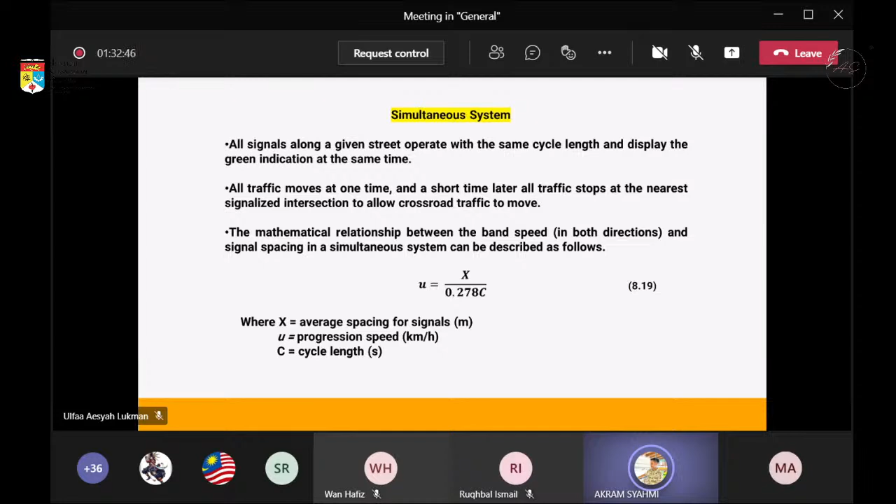In a simultaneous system, all signals along a given street operate with the same cycle length and display the green indication at the same time. Under this system, all traffic moves at one time, and a short time later, all traffic stops at the nearest signalized intersection to allow cross-road traffic to move. The mathematical relationship between the bandspeed, which is in both directions, and signal spacing in a simultaneous system can be described as U equals X over 0.278 times C, where X is average spacing for signals in meters, U is progression speed in kilometers per hour, and C is cycle length in seconds.

With the alternate system, intersections on the arterial are formed into groups of one or more adjacent intersections. The signals are then set such that successive groups of signals are given the right of way alternately. This system is known as the single alternate when the groups are made up of individual signals, that is, when each signal alternates with those immediately adjacent to it. It is also known as the double alternate system when the groups are made up of two adjacent signals.

And so on. The speed of progression in the alternate system is given as U equals N times X over 0.278 times C. The value of N depends on which type of alternate system we need to use, where N equals 2 for the single alternate system, N equals 4 for the double alternate system, and N equals 6 for the triple alternate system. An alternate system is most effective when the intersections are at equal distance from each other.

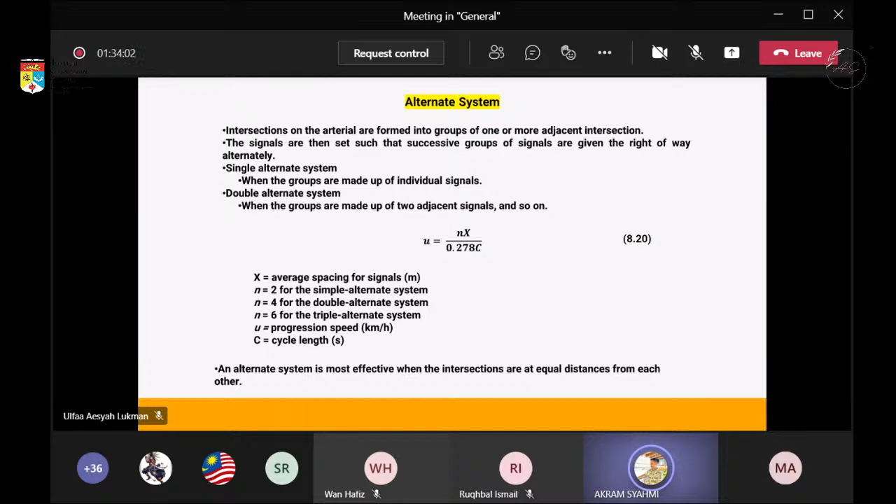From example 8.8, we can observe how to choose an appropriate alternate system for an urban arterial. In this question, from the given condition, we need to determine whether a single, double, or triple alternate system is preferable for this arterial if the velocity on the arterial is 56 km per hour. Since there is one intersection in another coordinated system, it is necessary to use the cycle length at that intersection, which is C equals 60 seconds. We also need to use equation 8.20 to determine the progressive speed for each alternate system.

For the single alternate system, we got 18 km per hour, and 36 km per hour for the double alternate system. And the mean speed for the triple alternate system is 54 km per hour. Thus, since the mean speed is currently 56 km per hour, the triple alternate system is preferable because this requires a progressive speed that is approximately equal to the existing mean speed.

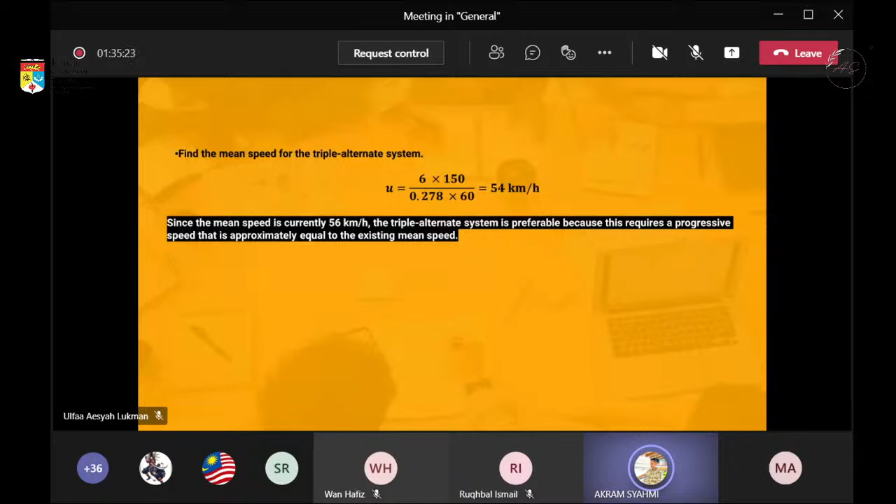Now, my friend Ruqhbal will continue the presentation with his part. Thank you. Okay, thank you so much.

And now we will proceed with the progressive system. So what is actually the progressive system? The progressive system provides for a continuous flow of traffic through all intersections under the system when traffic moves at the speed of progression. The same cycle length is used for all intersections, but the green indication for each succeeding intersection is offset by a given time from that of the preceding intersection, depending on the distance from the preceding intersection and the speed of progression for that section on the street.

When the offset and cycle length are fixed, the system is known as the limited or simple progressive system. Meanwhile, when the offset and cycle length can be changed to meet the demands of fluctuating traffic at different times of the day, it is known as the flexible progressive system.

Going to the design of progressive signal system. The design of a progressive signal system involves the selection of the best cycle length using the criterion that the speed of progression is approximately equal to the mean operating speed of the vehicles on the arterial street. This selection is accomplished by a trial and error procedure, and equation 8.19, which is the equation from the simultaneous system, can be used to obtain a suitable cycle length by using the mean operating speed of the arterial for U and the measured distance between intersections as X.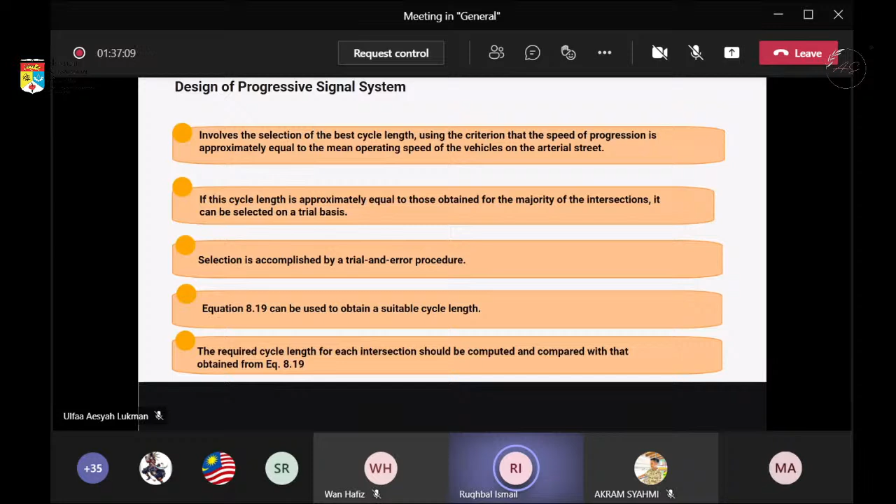There are 6 first steps used in any method, which are: first, the collection of adequate data on traffic volumes; next will be the intersection spacings, the speed limits, the on-street parking, the operating speed, and the street geometrics. Nowadays, there are also some computer programs developed to cope with several problems associated with progressive signal timing, such as the large variations in distances between intersections, the differences in speeds between traffic streams in opposite directions, the variable speed patterns in different sections of the system, and the requirement of a high level of computational effort.

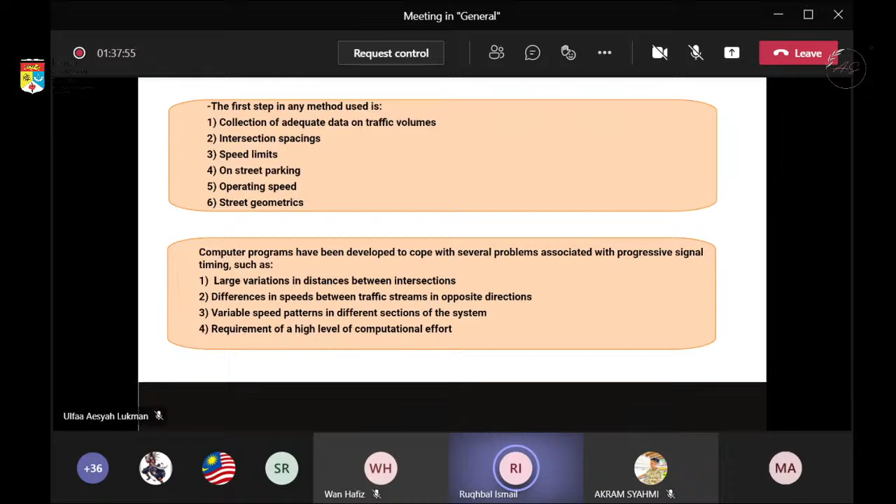With the advent of microcomputers, several programs have been developed that can be used to design an arterial signalized system. One such program is a version of Transyt-7F, which is a system that uses a genetic algorithm to optimize cycle length, phasing, and offsets. Transyt-7F can also be used for several intersections along a street or a single intersection with complex or simple characteristics.

It provides a time-space diagram screen that gives a graphical representation of signal progression along the major street, as shown in the figure attached. This is an example of the software interface. The program has been integrated with the highway capacity software, which is HCS and CORSIM, so that candidates of timing plans obtained by TRANSYT-7F can be evaluated.

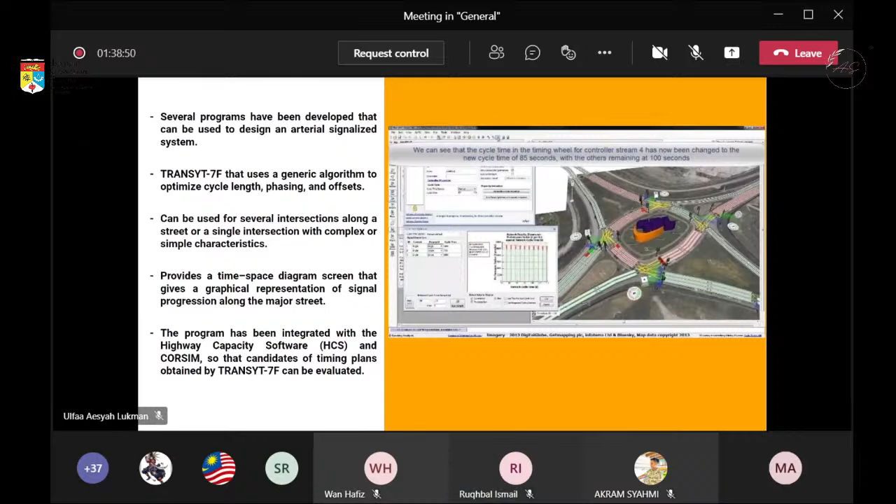Now we are going to discuss freeway ramp control. It is the application of control devices such as traffic signals, signing, and gates to regulate the number of vehicles entering or leaving the freeway in order to achieve operational objectives. The objective is to balance demand and capacity of the freeway in order to maintain optimal freeway operation and prevent operational breakdowns.

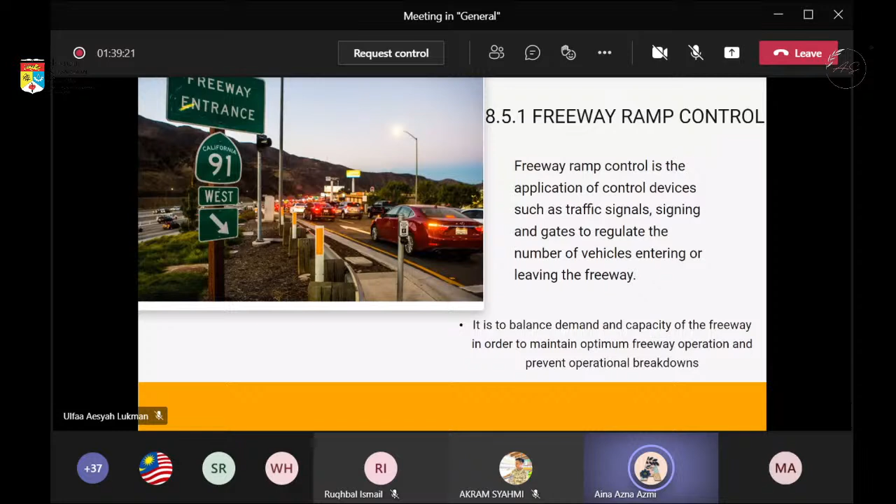There are two applications of freeway ramp control: entrance ramps and exit ramps. For entrance ramps, it is to regulate the number of vehicles entering the freeway and to reduce freeway crashes. For exit ramps, it is to reduce safety hazards and congestion and to encourage more traffic to leave the freeway.

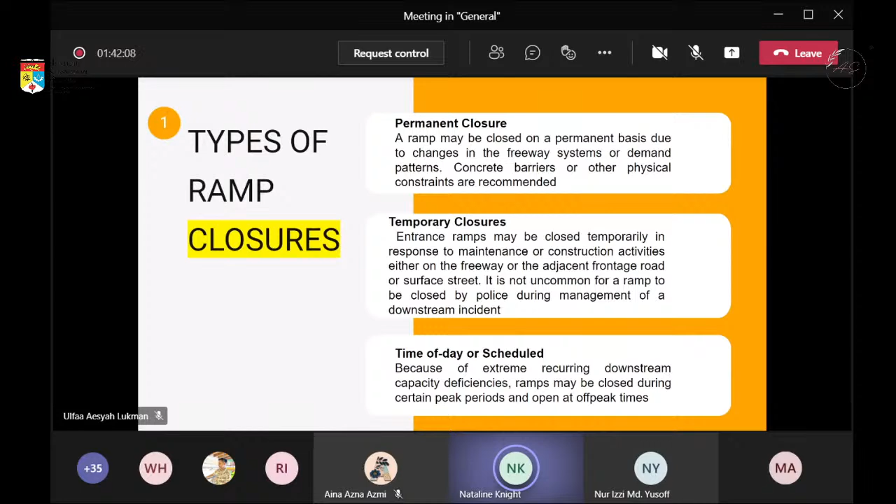Next is traffic responsive metering. It is directly influenced by mainline and ramp traffic conditions. It is selected on the basis of real-time measurements of traffic variables, and the basic requirements include a traffic signal, detectors, a ramp control sign, and a controller.

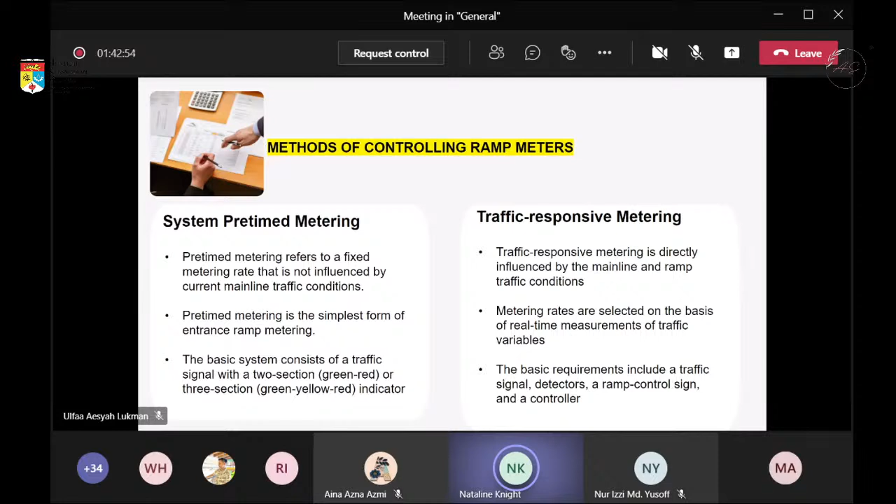Based on both pictures, system pretimed metering and traffic responsive metering: for the first, system pretimed metering, there is also a warning sign which informs motorists that the ramp is being metered, a controller which is actuated by a time clock, and detectors shown are optional, but when used will enhance efficient operation of the system.

For the traffic response system, optional features include a queue detector, which when continuously actuated indicates that vehicles queued on the ramp may interfere with traffic on the local road. There's also a merging detector, which indicates whether a merging vehicle is still in the merging area, and a checkout detector, which indicates whether a vehicle uses the green interval to proceed to the merging area.

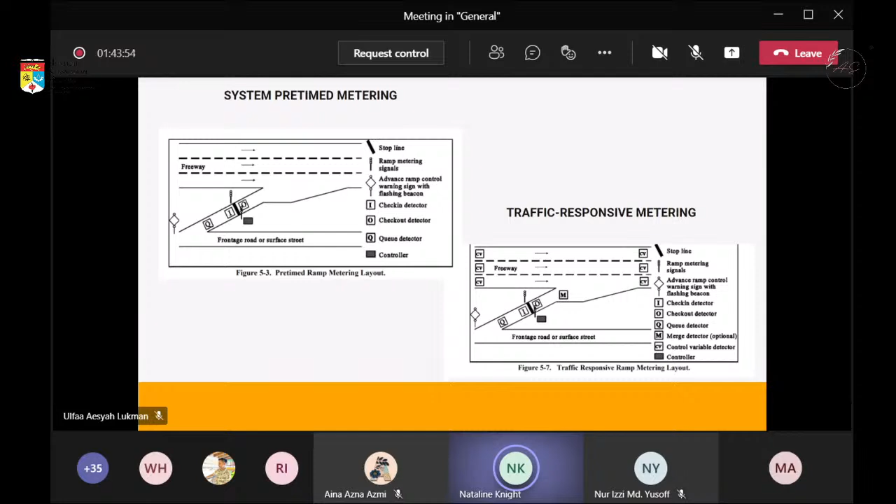So lastly is the method to determine the metering rate. The first is the local traffic responsive. This method uses traffic conditions immediately upstream and downstream of the metering ramp to determine the metering rate. It is similar to the pre-timed system in that it is frequently used as backup when a system-wide traffic algorithm fails. In contrast to the pre-timed system, monitoring of traffic conditions along the freeway with loop detectors is required.

Next is the system-wide traffic responsive, which is used to optimize the flow of traffic along the freeway. The selection of metering for a location is influenced by the traffic condition at other ramps within the system or along the corridor. It is necessary for data to be collected from many upstream and downstream ramps, and also from cross-street signal controllers and the central computer. That's it, thank you.